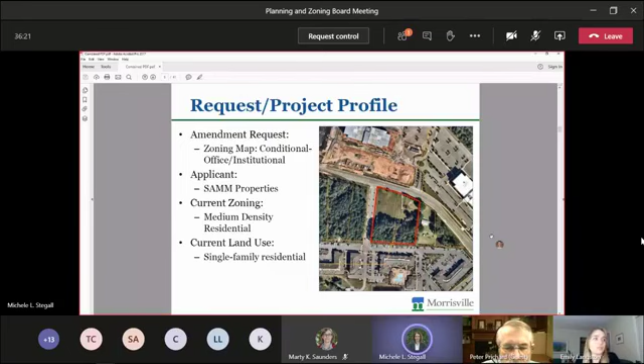3109 and 703 Slater Road are two adjacent parcels, each crossing into both Durham and Wake counties. The property is approximately 2.90 acres in total. The existing land use is single family residential. The 2009 future land use plan designates the property for office use, consistent with the request for conditional office institutional zoning. The request is for only a zoning map amendment, not a comprehensive plan amendment.

3109 Slater Road is within the corporate limits of the town of Morrisville. 703 Slater Road is not, so 703 Slater Road will need to be annexed into the town limits.

Michele, I think there are two of these, right? Are we talking about both of those Slater Road properties at the same time or one at a time? Eliot Ward is going to be doing a separate presentation for both of the rezonings tonight on Slater Road. This one, for two parcels adjacent to each other, is considered one rezoning, and his is also on Slater Road, but will be presented separately. Okay, I got confused between when you said there are two properties. Yeah, thank you. Sure.

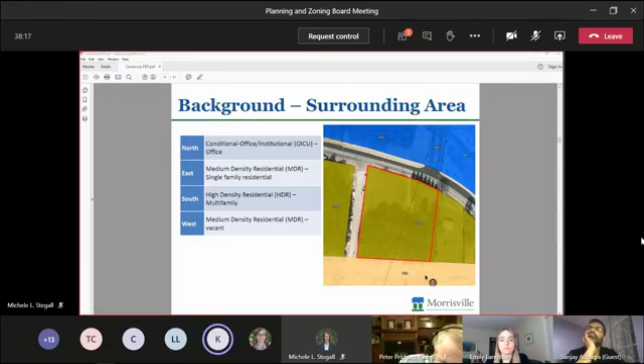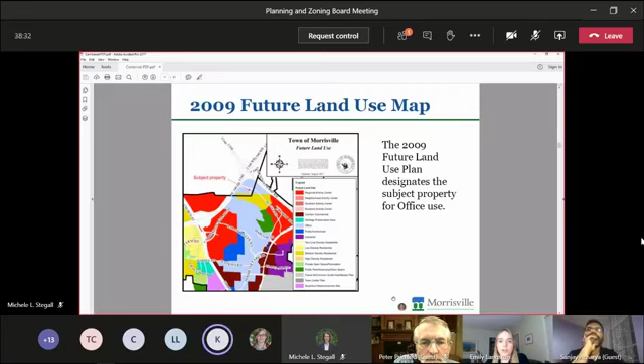The 2009 future land use map again designates this area for office use. You can see the subject property there in the upper left corner. The draft future land use map also designates the area for office.

The applicants have proposed several conditions on the rezoning. First, this list of principal uses that would otherwise be allowed in the office institutional zoning district will be prohibited: an indoor kennel, a central utility plant, a parking deck or lot as a principal use, a utility facility major or minor, a hospital, a bus station, a park and ride terminal, a transit station, a private recreation facility outdoor, private entertainment facility outdoor, a cemetery, a car wash or detailing business, or a sports training facility outdoor.

In addition to the prohibited uses, the applicants have proposed additional conditions: building cross access to the property to the east; the development will be consistent with the sketch plan shown shortly; the applicants will construct an 8-foot multi-use path along Slater Road; and the building architecture will provide horizontal articulation, vertical articulation, change in materials and/or change in colors above the first floor along the corner of the building addressing the intersection of Slater Road and Suburban Road.

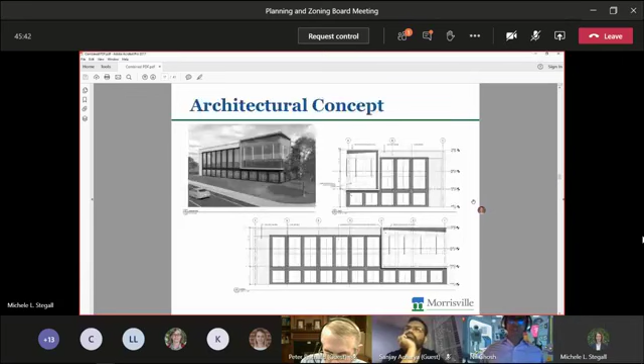You may not be familiar with SAMM Properties because this is their first dip into the Morrisville market, but for almost 2 decades, SAMM has been active developing Class A office space and retail centers, particularly in the Wilmington area. The owners of SAMM Properties are North Carolina natives, and they are committed to providing high quality design in Class A office buildings. Over the years, their attention to detail has caught the eye of several large employers like nCino, Wells Fargo Advisors, and WellCare Home Health, which is the largest private healthcare provider in the Wilmington area. They want to bring their expertise to Morrisville, hopefully to attract another large employer or several small businesses to one of their signature office buildings.

As Ms. Langston explained, we are seeking a rezoning, which is consistent with both the current and the future land use map designations. Our requested rezoning includes zoning conditions which ensure a development that is consistent with the sketch plan. It will be a single office building around 36,000 square feet in size with an attractive corner feature, which will give the building some real character.

But SAMM is not focused solely upon the potential tenant's experience, and they understand a larger context of becoming a new member in the Morrisville community. This is why they have made commitments so that the parking field will not dominate the frontage. Along Slater Road, where the parking field is not shielded from view by the building, they have committed to additional landscaping, and they even have committed to constructing an 8-foot wide multi-use path along Slater Road that will fill in an existing gap in the sidewalk network. So we're pretty proud of this case.

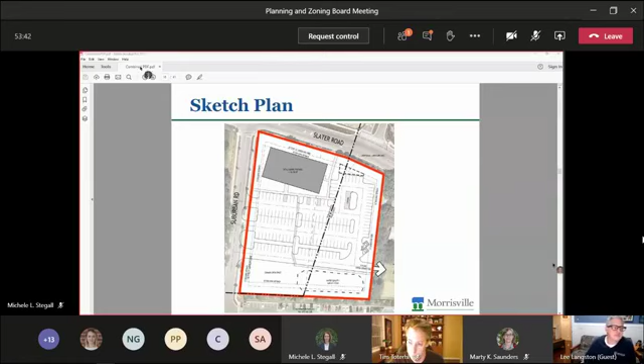And I believe that's Eliot. Yes, good evening. I'll be presenting the other item on Slater Road. This is item 2021-23-0, a request to amend the land use plan and zoning map for 0 Slater Road. Oh, apologize, I'm waiting on control to start. I think there's a delay.

There we go. Okay, so the subject parcel, again outlined in red, is located southeast of the intersection of Carrington Mill Boulevard and Slater Road and is bisected by Slater Road. The site is approximately 25.28 acres and specifically identified by Wake County PIN 0756-19-5721. Dominion is requesting that the land use plan be amended from the Regional Activity Center designation to the Business Activity Center designation on the north side of Slater Road, and the High Density Residential designation on the south side of Slater Road. The petitioner is also requesting that the zoning map be amended from the Medium Density Residential district to the Conditional Business Activity Center district on the north side and the Conditional High Density Residential district on the south side. The site is adjacent to the Regional Activity Center zoning district to the south and east, the Office Institutional District to the north, and High Density Residential District to the west.

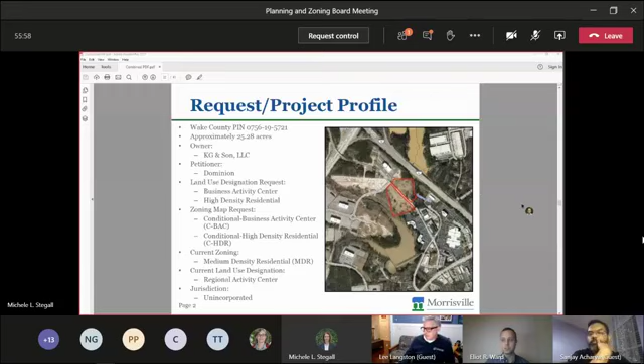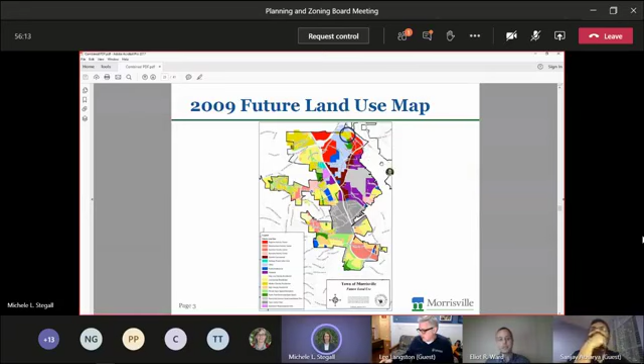The 2009 land use plan designates the parcel as regional activity center. You can see it circled here. And the draft land use plan designates business activity center on the north side of Slater Road and high density residential on the south side, which is in line with the request.

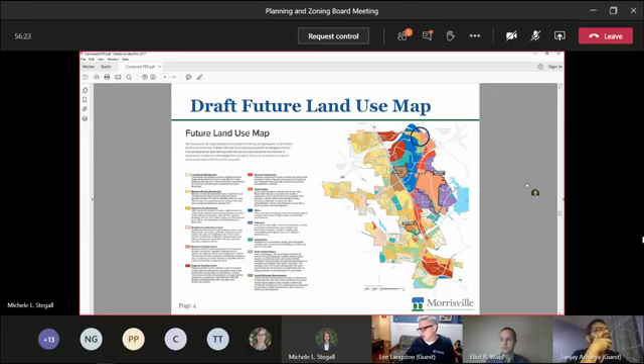The applicant provided a TIA, conducted in May 2020. It indicated that the proposed development is expected to generate 2,698 new daily trips, with 297 trips in the AM peak hour and 316 trips in the PM peak hour. The TIA recommended the developer construct a 3-lane cross-section on Slater Road between the access points of the proposed development, with all access points expected to operate acceptably as full access driveways.

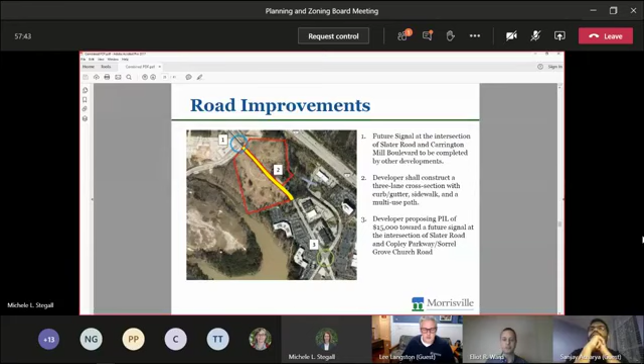Per the town's current payment in lieu fee of $2,244 per unit for new multifamily development, the estimated Parkland PIL contribution currently is $516,120 for the anticipated 230 units. The estimated school impact for the development is 50 students for the 230 anticipated units.

For purposes of time, there are numerous conditions, so I will summarize. For this request, the applicant has offered to prohibit the uses shown on page 7, which would typically be permitted in the high-density residential and business activity center districts. The applicant has also offered numerous other conditions, including but not limited to limiting the size of the office building to 137,500 square feet, and limiting the number of units for the multifamily development to 230.

They've also offered various cross-access agreements to the various adjacent parcels, as well as the traffic signal and road improvements mentioned earlier.

Staff recommends approval of the requested land use plan amendment and zoning map amendment from Regional Activity Center to Conditional Business Activity Center District on the north side of Slater Road and Conditional High Density Residential on the south side of Slater Road for the following reasons. The requested land use plan amendment is consistent with the recommendations in the final draft of the land use plan currently under consideration. The requested zoning map amendment would allow for development that is compatible with the adjacent office park to the north and the adjacent multifamily development to the west.

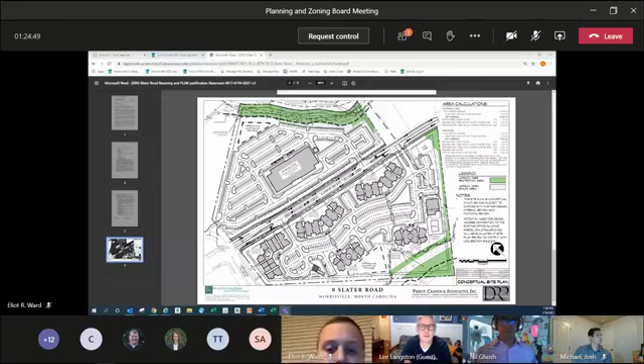So there's a pool and clubhouse area on the south side on that multifamily. If you look on the eastern side, or the right-hand side of that page, towards the parcel boundary, there is a clubhouse and pool area that will be an amenity center for the multifamily, in addition to the dog park, I think, yeah. Is there going to be more of a pocket park for kids, like say 8-year-olds, you know, play equipment, that type of stuff?

Tommy, I'm happy to have you answer that question because I don't know it. Sure, we haven't gotten to that level of detail yet with the plans, but there are certainly places where we could put that. There's an area between buildings 4 and 2 where a tot lot playground area could be positioned.

Yeah, I can kind of agree, although we've had some applicants in the past say that the people who live in these units are a little younger and don't generally have too many kids, but there will be some. If you have 50 kids going to school, potentially you'll have some that would play. And this is especially far from any other park amenities we have in town, so something would kind of be helpful, I think. But...

Yeah. And thanks for that. So I guess Tommy's already looking into it and where they can fit, and has eyeballed that area between buildings 4 and 2 for potentially a tot lot. Yeah, great question, I think of that too.

So, any other questions? And I apologize, everyone, my whole computer just crashed on me, so I'm on my phone. So we lost the sketch plan. I saw something weird going on there.